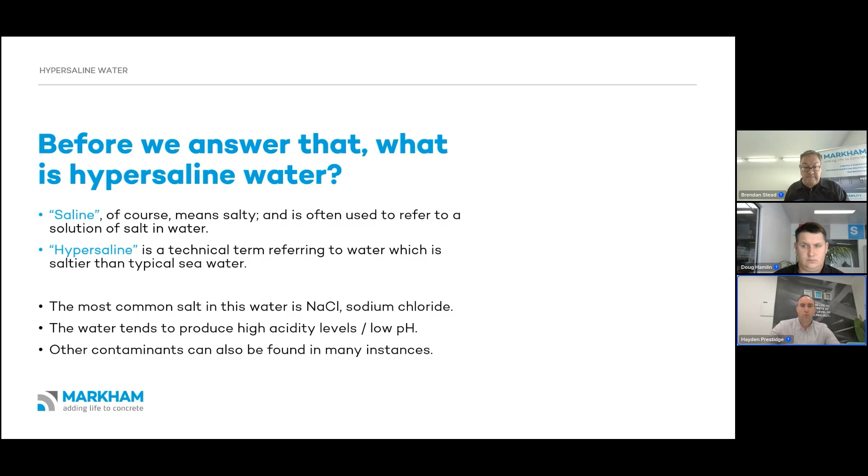So let's look at that now. So that's outlined what hypersaline water is: a very high concentration of salt in water. And so this is where MARKHAM really comes from. Our sole purpose is to add service life to concrete, and that's why we often think about this. How does this sort of environment affect concrete, and what are the issues here that we're trying to protect against?

Concrete is very porous at a microscopic level, and this hypersaline water does carry into the concrete, and it builds up and it can eat away the cover concrete. So it really damages your structural integrity. It leads to that sort of premature deterioration of the concrete cover.

Now, as you lose cover on the concrete surface, it just becomes more and more porous, allowing more contaminants, and obviously gets through to the depth of steel. We see things like expansion, cracking, spalling, breakouts, stemming from this environment. It really breaks down the strength, the acidity. It starts eating away at the concrete there, and then along with that you get sulfate attacks, etc., which leads to that expansion, cracking, etc.

And all these things decrease the life of a structure and really pull back its durability and its ability to do what it needs to do to perform. With that, it also brings a lot of maintenance issues and ongoing maintenance problems. And as you would know, and we know, taking a structure offline, especially once live or full of water or operating, is a costly exercise. So that's really how it affects.

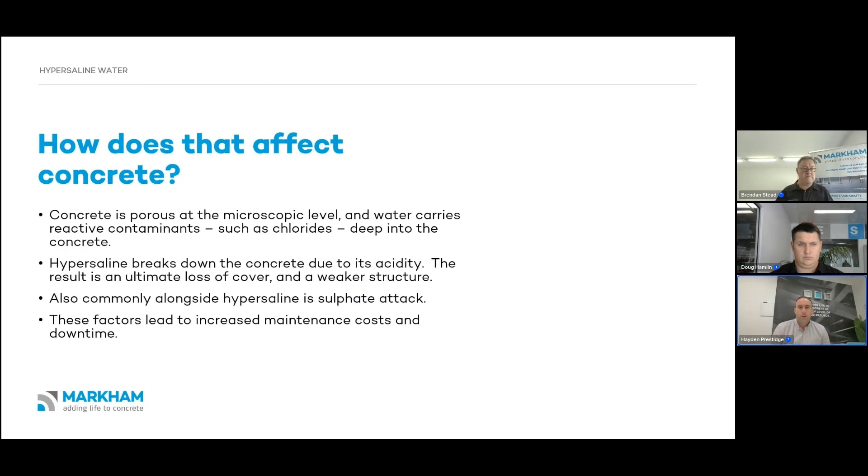But I suppose we want to focus on the structural integrity and what type of structures. Let's have a think about that. So if we can just jump to that next slide, where do these issues occur? And it's good to see a number from the mining industry here, because this is a very common one.

And you think about that water that's coming out of the ground, the bore water, often full of very high concentrations of salts. So hypersaline water coming up, bringing with it all these minerals, sulfates, heavy metals, etc., that can attack concrete. Also, you think about the return water of processes used through mining, often going back through to a tailings dam, and very high concentration, often multiples of what you'll find with typical seawater.

Local councils and water authorities is a big one. So where they're treating water, not only in the wastewater type scenarios where you get that acid attack on concrete, but even soft water, potable water will have some effect on concrete. Desalination plants is a big one. Obviously, you are working directly with salt water, and that build up, that brine, and the protection needed to give it more life through that.

And then obviously coastal environments, where we get that wet and dry cycle. As with any of these structures, actually, the wet and dry cycle is a big player too, because you get that wash and then you get that hypersaline going through it, and you get that build up and loss of cover. So that's the sort of structures we're thinking. No doubt you might have a couple more on your list, so feel free to put questions in as we go as well.

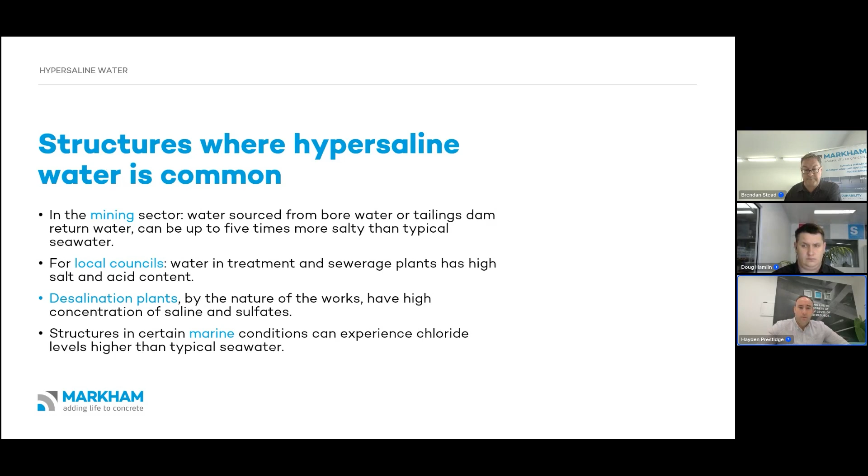So that's some of the challenges. We've looked at what hypersaline is. We've looked at what type of projects it affects. But let's have a look at what can be done.

So Doug, hopefully you're ready to roll now. Yep. How does that sound? Good. Yeah, thanks, Hayden. It's a good overview there of the hypersaline.

So first and foremost, it's really important to understand that while concrete looks a solid waterproof material, it's not at a microscopic level. And this is because as the concrete forms, as it cures, the bleed water escapes out of the concrete, and you get left with a porosity or pathways in the concrete that moisture can get back into.

Now, obviously there's a lot of good effort that goes into designing and constructing the concrete, making sure the mix designs line up with codes, all those sort of things. But even with all that, you still get this porosity in the concrete. It's just the nature of the material.

So those pathways carry moisture through the concrete, and the impact of that is that it also carries contaminants through the concrete as well, such as chlorides in a marine or hypersaline environment. Many other contaminants can get carried into the concrete and move through these porosities, transported by the moisture. So it's really important when you're talking about concrete service life to close or seal that porosity up, and that's where we at MARKHAM come in.

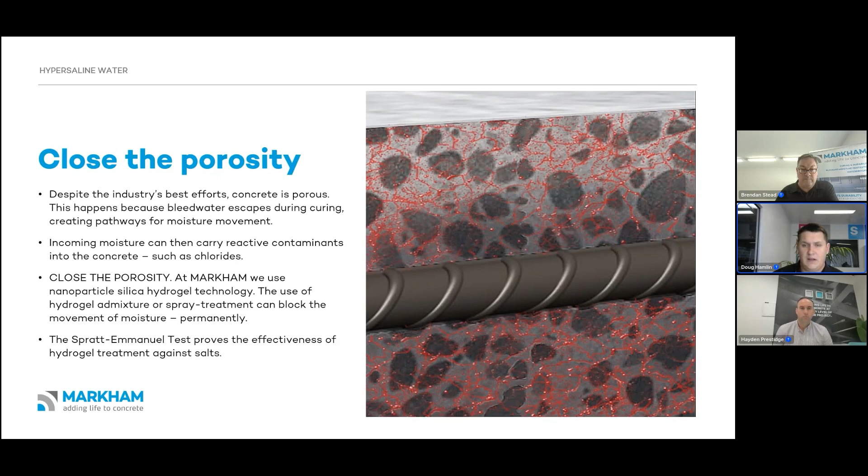Now we'll cover it off a bit later on. We've got a report that looked at a car park in Vancouver that goes back to the early 90s. And this was looking at both the acid rain that they get there, and then also the de-icing salts that get tracked in on the car tyres, and proving some very effective durability performance there. So we'll look at that again shortly.

The preventative maintenance topic, as many of you will be aware, being in the engineering asset management space. The earlier we can get on and protect something or prevent something from happening, the better. The thing with concrete deterioration is that it's a self-feeding cycle, so it's not gradual or linear. It doesn't progress linearly. It's exponential degradation that happens. So once you start getting that damage start to manifest, it moves very quickly to cracking, spalling, starting to need major repairs, that type of thing.

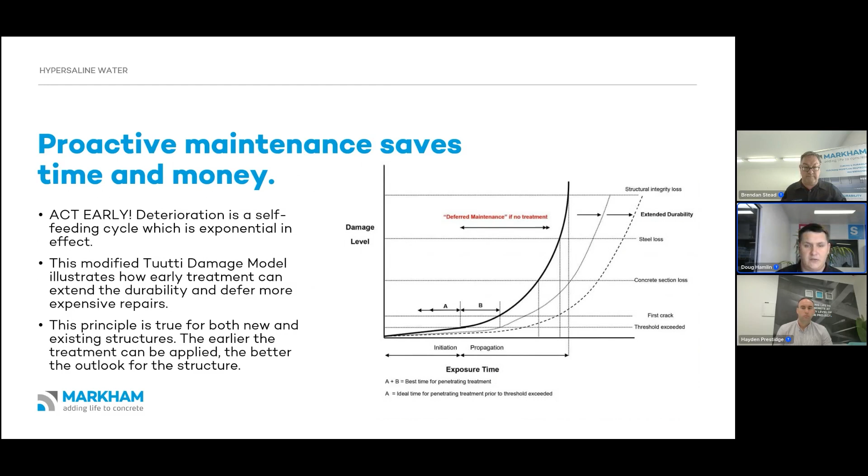So that's just really highlighting the need to get that protection on, ideally at day one, with admixtures, good concrete design, and then if you don't get that window, protecting it as soon as possible after that, before that damage starts to really show, and that gives the best outlook, best service life expectations for that structure. So just on that, we're not saying with the hydrogels that we completely stop any attack, but we push that curve as far as we can in terms of the service life, and give that structure the best chance of a long service life.

Right, now this is some facts and data I'm sure everyone's going to be interested in. So we've just done some recent testing with our hydrogels, the Acuron 300, Conquer B50, alongside calcite. Now calcite is a very well recognised and high performing admixture in the market. This is not in any way to downplay the performance of calcite. It's a very well respected admixture and commonly used, and that's why we wanted to do some trials up against it. Now these were carried out independently with Boral.

Firstly we looked at some field testing, which as you'd all know has some challenges with variability, concrete testing, that type of thing. But what it did show is even with those sensitive mixes, we were still able to get good results with the Acuron 300 in that example, with some significant improvements both in the water penetration and chloride diffusion. Strengths were much of a muchness there.

Then we progressed to the laboratory testing, where we looked at strength again and the water penetration. As you can see there, in that controlled environment where you haven't got that variability of the field, we are on par with the calcite admixture, so performing very similarly. And what's interesting is even on a nearly 80 MPa concrete, you're still getting that 7 mils of water penetration into that concrete. That's using the British standard 12390-8, which puts samples under a 50 metre head pressure. So it still demonstrates that it's got that porosity, and then you can see the subsequent reduction in permeability there.

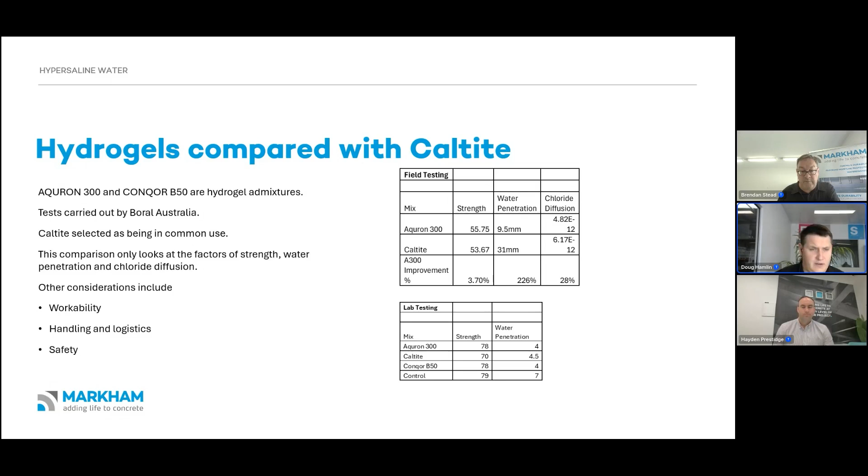The handling and logistics factors, so that's the safety around dosing, that type of thing, and the physical quantity of admixture required. There's some very good advantages there with the hydrogels, being a nil VOC and potable water safe admixture, able to be used safely by your teams, by the staff, and not have any negative impacts while they're pumping, placing on site. So I think that's enough on that one. If we could move on.

Just wanted to talk about a few projects now. So one project we're privileged to be involved in is the Carrapateena mine site in South Australia. Now this has very high levels of hypersaline water, and we've been involved in protecting the new structures both underground and surface, and providing a good quality concrete right from day one, so it places well, you get limited cracking, those types of things, and couple that together with the fact that you're getting a waterproof concrete, protects against that hypersaline water from getting into the concrete and breaking it down from inside.

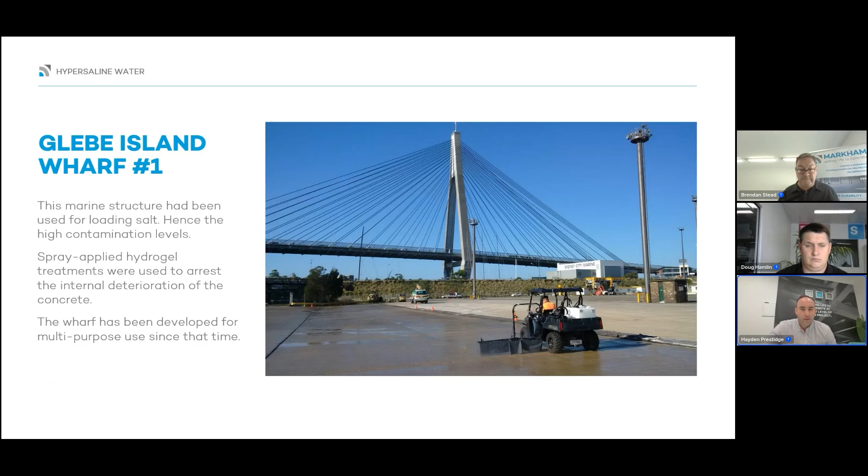So it's an existing structure. Now, we've talked a lot about admixtures. Now this is an existing structure, and being able to spray apply to the surface, penetrate in and close that porosity on existing structures has been very beneficial as well, to the point now where this wharf has actually been repurposed for a multi-use site where they're getting their extension of life out of it. So being able to take the moisture out of the equation, stop the chlorides ingressing or elevating in levels, and really halting that corrosion cycle and pushing that curve out that Doug was speaking of earlier for extending that service life. Back to you for another mining one.

Yeah, thanks. So another site we've been involved in is Mungari, the Evolution mine site. So again, challenges with the hypersaline groundwater. This was a recent extension being conducted there, and obviously being about 20 minutes out of Kalgoorlie, there are some challenges around the hot weather, pouring in some very dry, hot conditions. So being able to provide admixtures that didn't contribute negatively to that and gave a good result in terms of the placing, pumping, not disrupting the standard concrete mix design, that type of thing. And getting that good result from day one, and then again being waterproof, protecting against that saline there.

I noticed Hayden mentioned earlier in the presentation the wet-dry cycling. This is very common on these types of projects. So we have got areas being washed down daily or every couple of days with the hypersaline water, and you get that wet-dry cycling. You get very saturated concrete, then it gets very hot. It's very harsh for concrete in terms of breaking down that microstructure, attacking the concrete, and degrading that durability, that service life that you would normally expect to get in normal conditions. Back to you, Hayden.

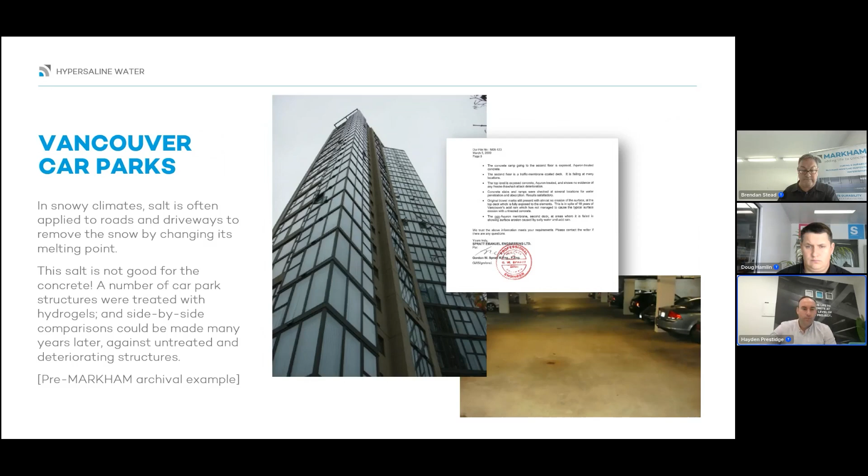Back to you. Yeah, cool.